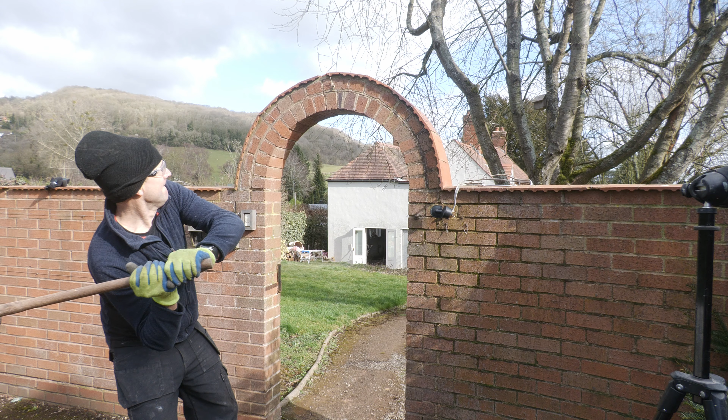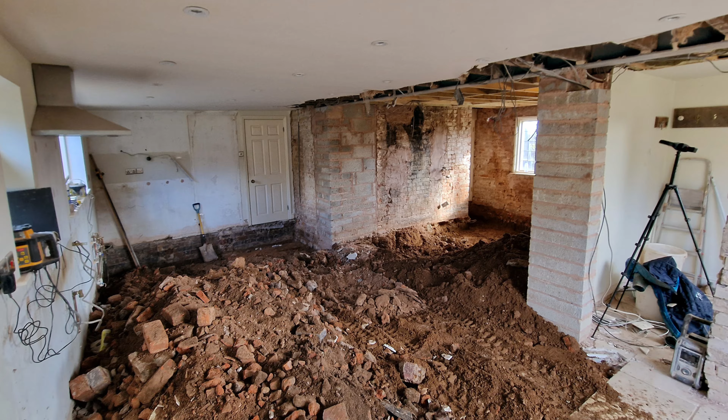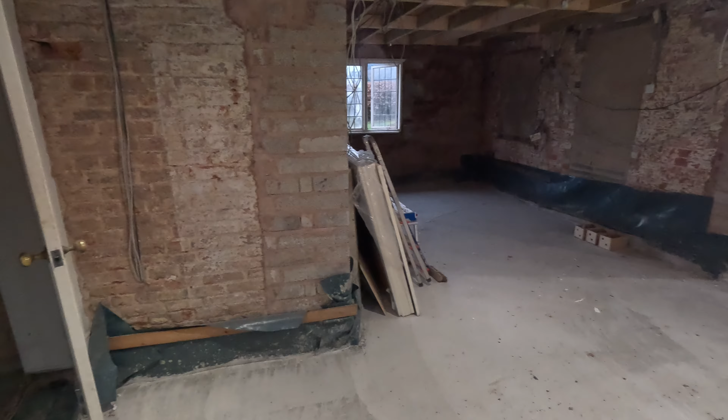A lot's gone on in the last couple of weeks. We had to demolish this gateway. I had to demolish these garden steps. I've had 7 skips, 8 tons of the wrong aggregate delivered, and a cement mixer with too much cement. But we've made enormous progress, and we now have a concrete slab poured in our kitchen, where only a few days ago it was looking like this. So in today's video I'm going to be explaining exactly what's been going on, with a particular emphasis on the underfloor heating system I'm going to be installing, which is going to be a Polypipe water-based system. And crucially, the builders have now left, so from this point on I'm on my own.

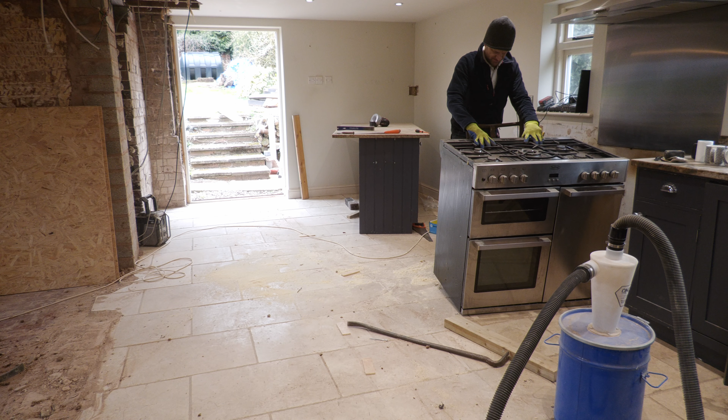So with the knock-through complete, I was in a race against time to remove the old kitchen so as not to hold up the builders with the excavation of the floor. The granite had been glued to the kitchen units with Gripfill and the sink with silicone, so I set about cutting through the Gripfill with my multi-tool. It was important to keep the granite intact and to dismantle the kitchen as carefully as possible, as I'd sold the kitchen for £950 on Facebook Marketplace.

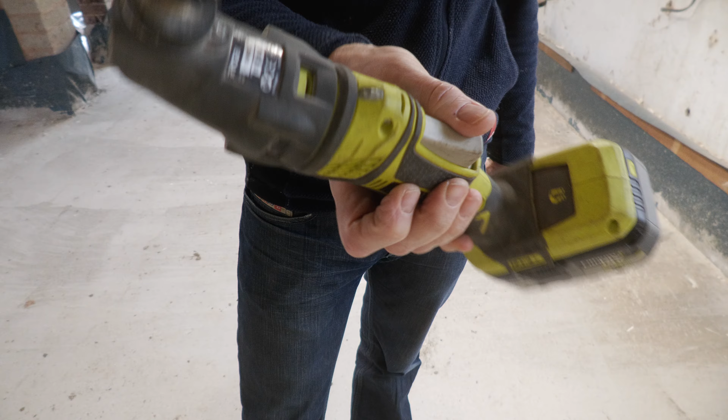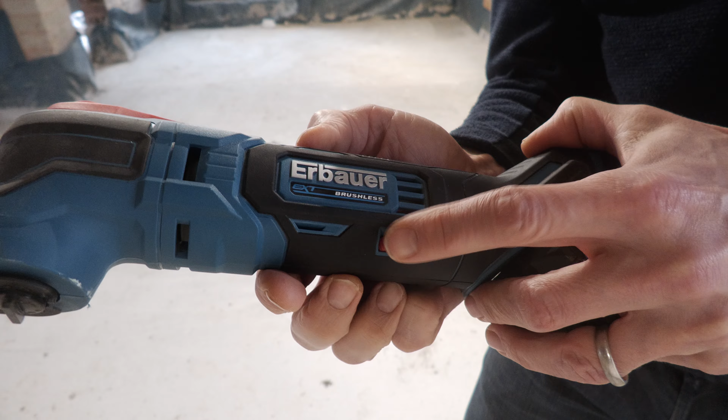I've had this multi-tool for a number of years now, but it kept overheating - I think the brushes probably need replacing. So I ran out to Screwfix and bought this one from Erbauer. I thought £84.99 for a variable speed, brushless multi-tool with a little case of accessories seemed like a decent deal. But also I had to buy something quick because I needed to get the kitchen out.

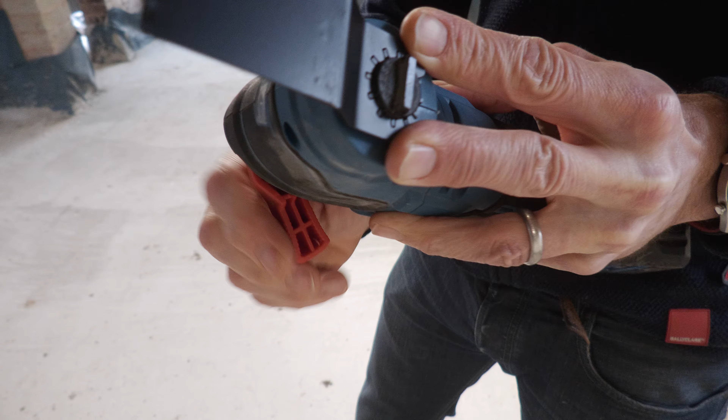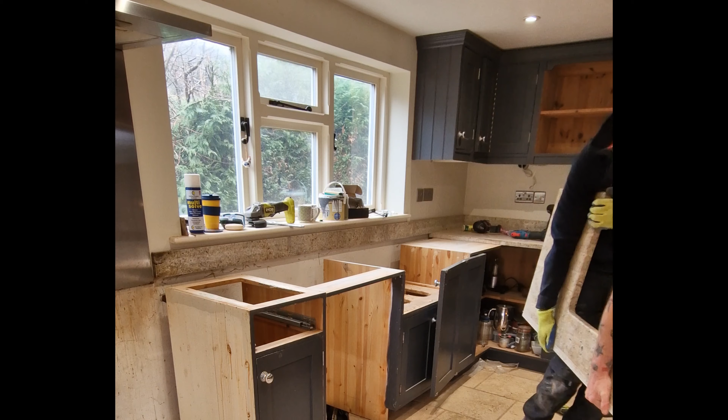The new tool was a vast improvement on the old, and I was able to cut through the remaining Gripfill and remarkably managed to remove all the granite without breaking it, even the section around the sink - apart from one of the splashbacks that unexpectedly fell off the wall and snapped off the corner.

When we were taking out this supporting wall last week, we got quite a lot of dust from the kitchen into the rest of the house. You just can't stop it getting in. So I was quite anxious to make sure this didn't happen when we were excavating the floor this week.

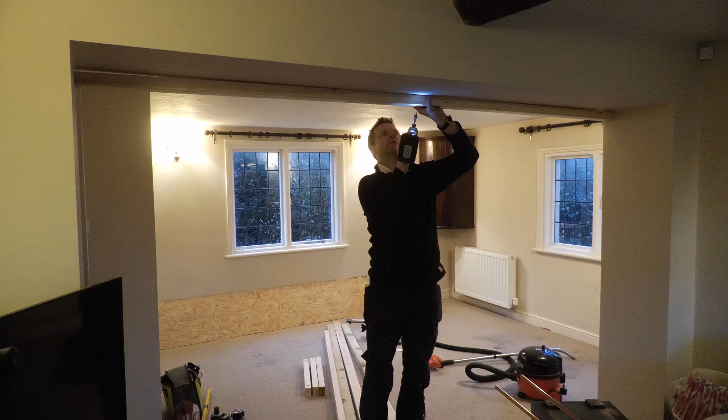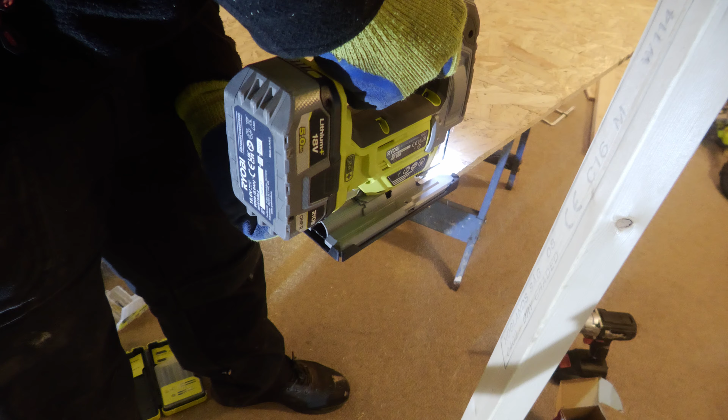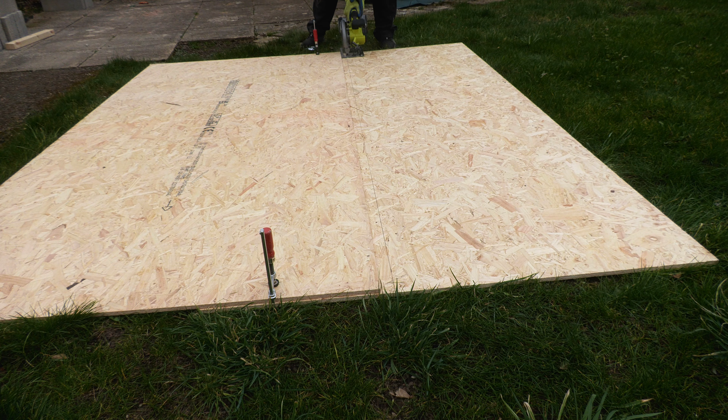Obviously screwed the shuttering ply to it, and then used expanding foam to fill up any gaps, because it's really important that there weren't any gaps for that dust to get through.

And this new expanding foam gun that I bought, which was a recommendation of Sam on my Discord forum, has been fantastic. You may have seen my video a few years ago with my original gun, which I think was an Everbuild. This one is non-stick, and that's quite a crucial difference - with that Everbuild, you had to clean it out almost immediately after using it, certainly a few days later. And even after cleaning it out with the acetone spray, I often found the ball bearing inside it stuck the next time I tried to use it, and you end up wasting so much foam. Whereas this, being non-stick, is much better because you don't have to clean the gun out as often.

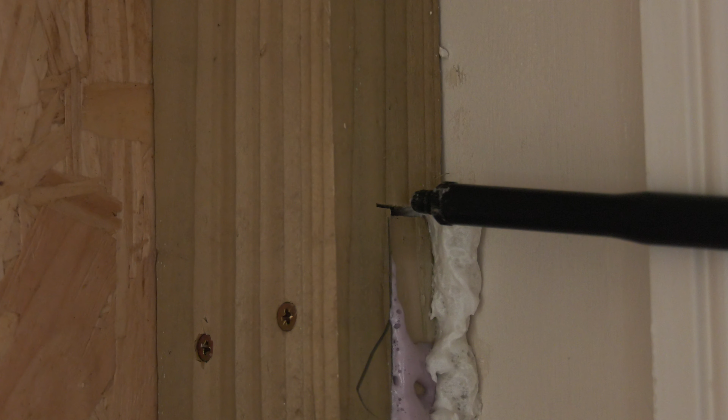You can leave the gun with foam on it for a much longer period of time. And this little control knob gives you really good control over the volume of foam coming out of the gun - you can slow it right down to a dribble.

Why am I boarding up so much of this room, you might wonder? Well, partly because I want to remove this chimney. And I know this chimney isn't load bearing and doesn't continue into the bathroom above because I laid a floor on top of it back in 2014.

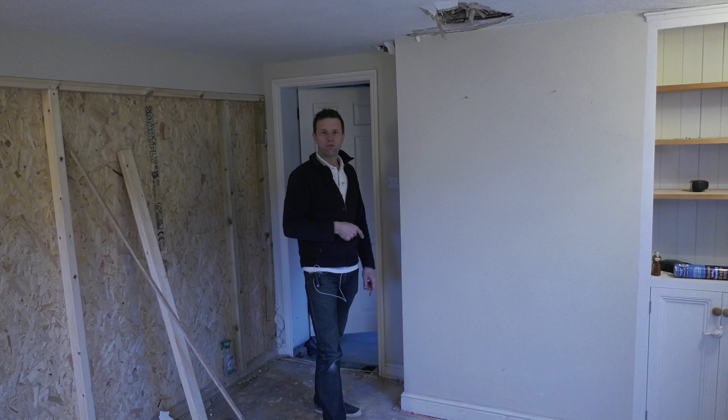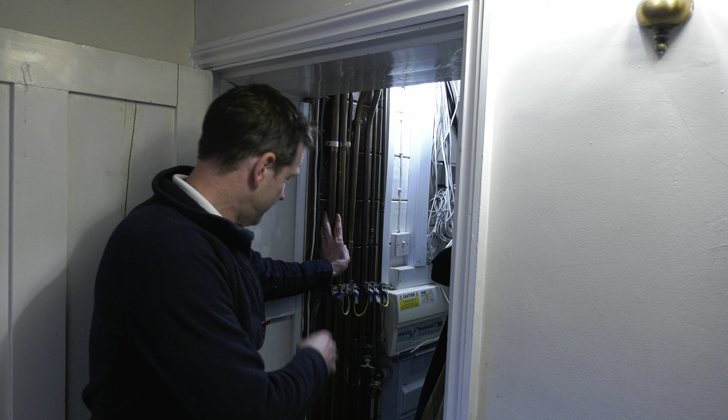The reason I want to remove this is because the manifolds for the underfloor heating will hopefully be on this wall, which removes the need for me to snake all the underfloor heating pipes around the room to where the central heating flow and return pipes are in this cupboard. The plan instead is to send an extension of these flow and return pipes across the floor to where the manifolds will be for the underfloor heating. And to do that, I'm going to have to cut up the floor to get across the room.

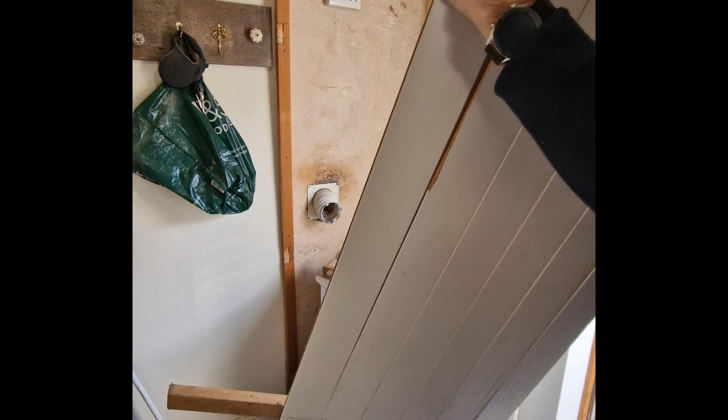I also had to rip out the cupboard I built a few years ago that housed our tumble dryer and washing machine. The pipework for the washing machine went in a diagonal right across the kitchen to this point here, including the waste, and considering how badly it was done, it's a miracle it never got blocked.

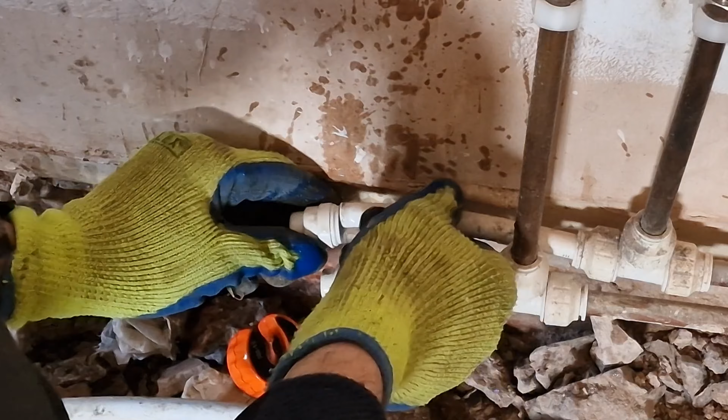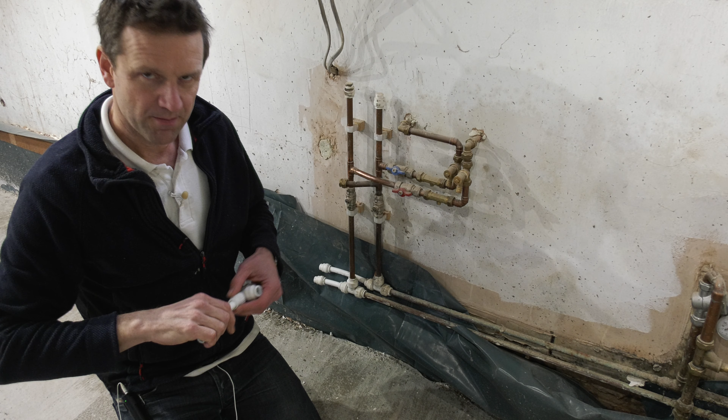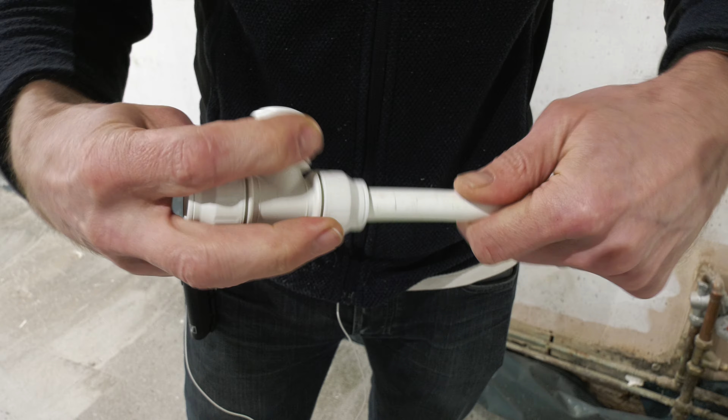But it did need capping off before the boys could work on the floor. I put a couple of push-fit stop ends onto the plastic pipe that the plumbers had installed back in 2010. I've never used this stuff before, it's remarkably easy. I'm still not sure whether I like it long term, but just remember, if you're using these fittings, don't make the mistake I made initially of not using the inserts that you have to insert into the end of the plastic pipe to support it before you insert it into the T or stop end and make it fast.

If you saw my video recently where I installed the dog shower with hot and cold water, the plumbing for this is now in jeopardy, given we may not have the sink in this position in the new kitchen. What I have done is made use of those 15mm plastic pipes to install a temporary cold water feed to our porch so I can reinstall the washing machine and dishwasher to tide us over until we have the new kitchen. Very important, as this could be a while.

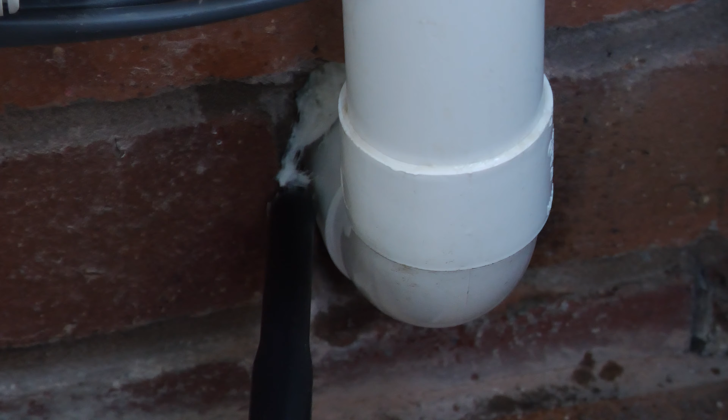I improvised a temporary waste with some spare fittings I had lying around and managed to route the grey water into the drain with a water pump hose.

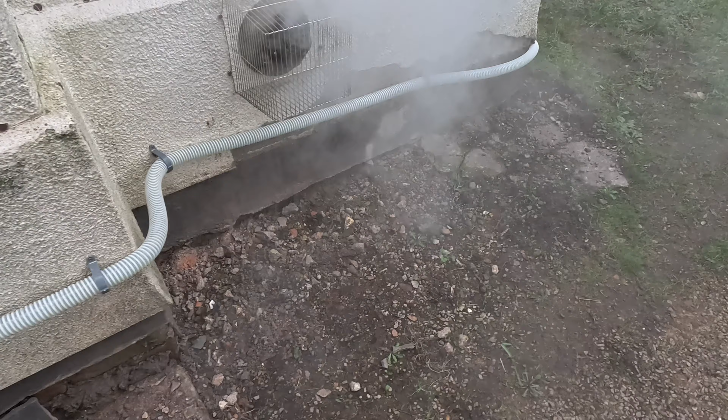And so we're on to the excavation part of this project, where I had to basically dig up the floor in preparation for the underfloor heating system.

There's a really good reason why people don't often attempt this in old period properties like this, because it's so much harder to excavate and more expensive to excavate all of this material than it would be in a new build, where you can simply plan the different layers as part of the construction.

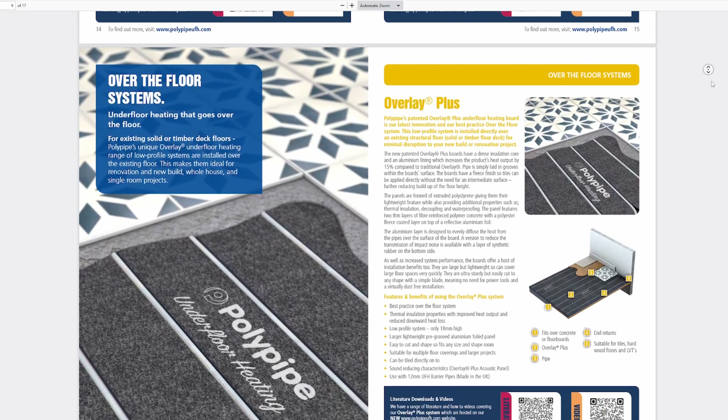Unless you're installing something like Nu-Heat's LoPro or Polypipe's overlay system, you're going to have to pull out a serious amount of earth from your house. In my case, 400mm, and I'll come on to exactly why in a minute.

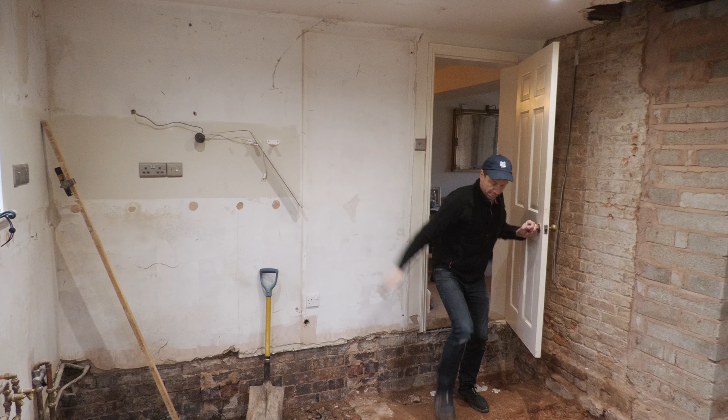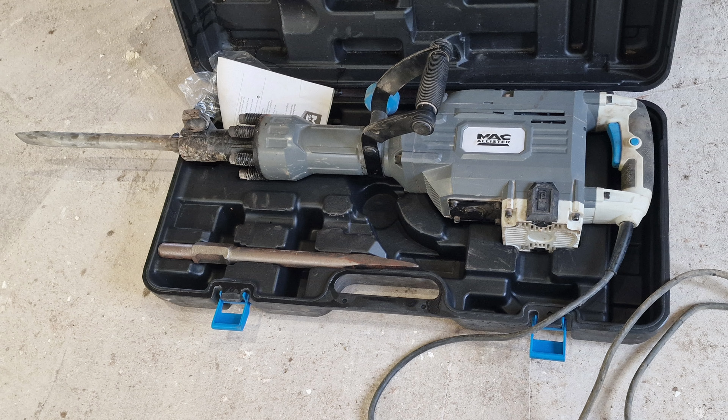One of my builders, Gaz, started using my MacAllister concrete breaker to dig up the floor. Thanks again to Gosforth Handyman's Andy Mack for recommending this to me. It's been a beast on this job. By the end of the day, most of the top layer was up and carted off to the skips in wheelbarrows.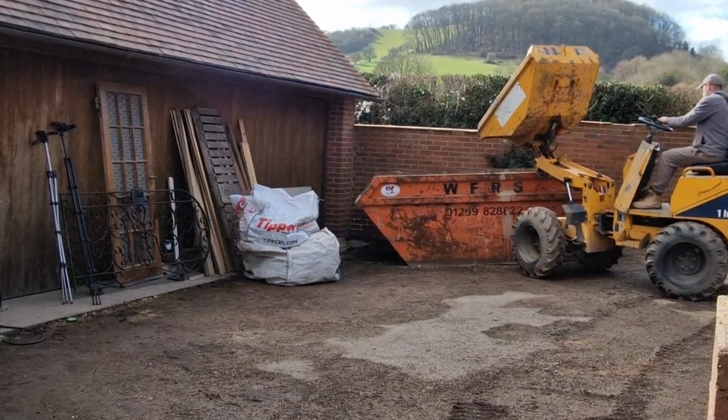But we still had a lot to excavate, and so I suggested we hire a micro digger to dig out the subsoil, and my other builder, Danny, then suggested we hire a 1-ton skip loading dumper to cart the soil from the house and into the skip, because once you've shut the door on the skip, it's very difficult to lift the wheelbarrow to empty it into the skip.

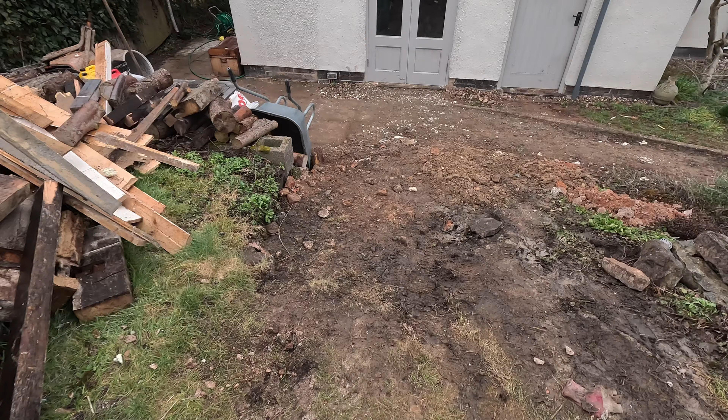This meant demolishing our garden steps and also the gateway into the garden, so the dumper could fit through, although I plan to remove both of these at some point as part of the re-landscaping of the garden. And I've got to say, demolishing that arch was great fun.

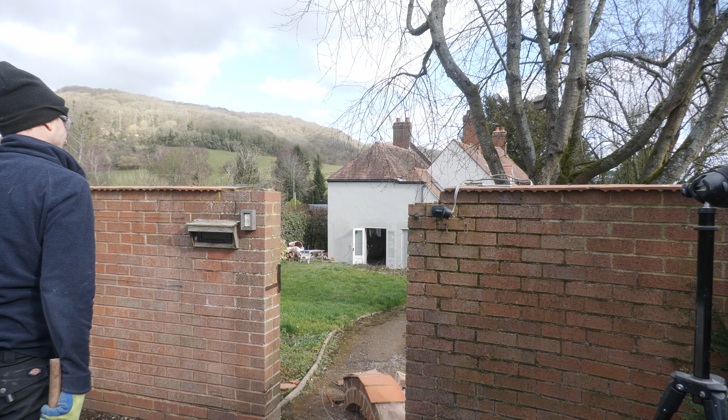Excavating 400mm of floor was producing a lot of bricks, soil and rubble, not to mention some other unwanted guests like these roots. We couldn't have managed without this mechanisation with the micro digger and dumper.

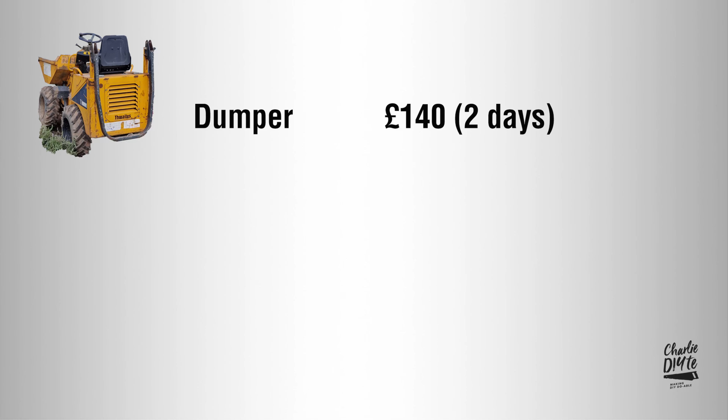But the costs were beginning to mount up at a frightening rate. So why take out 400mm of thickness, which after all is a lot?

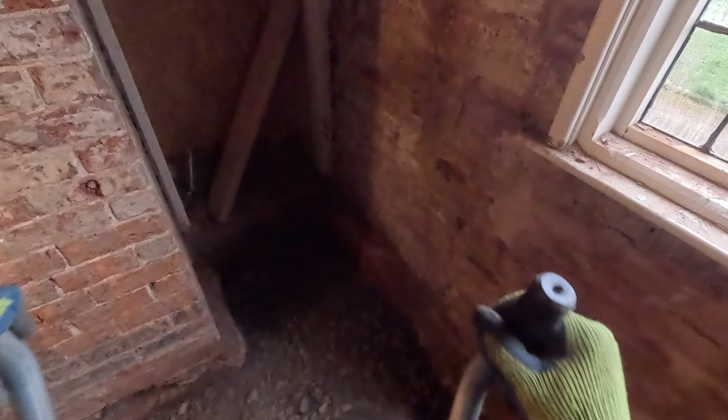Well, in our case, we've got 150mm Type 1 MOT, which is sat directly on a compacted soil base. You saw all those roots we pulled out. We wanted to make sure we had a really good base to start building off, and we compacted that with an Evolution whacker plate I hired locally.

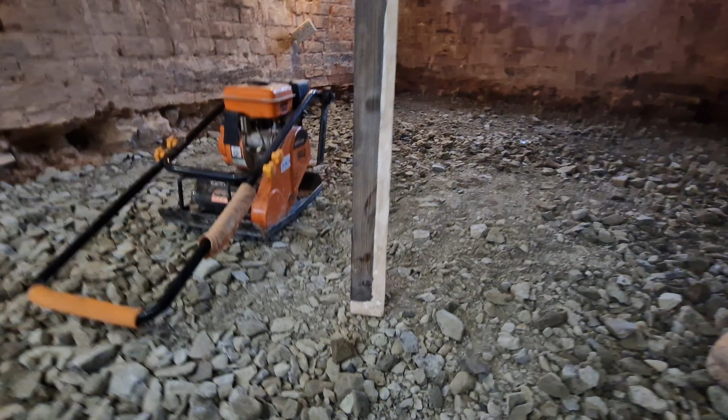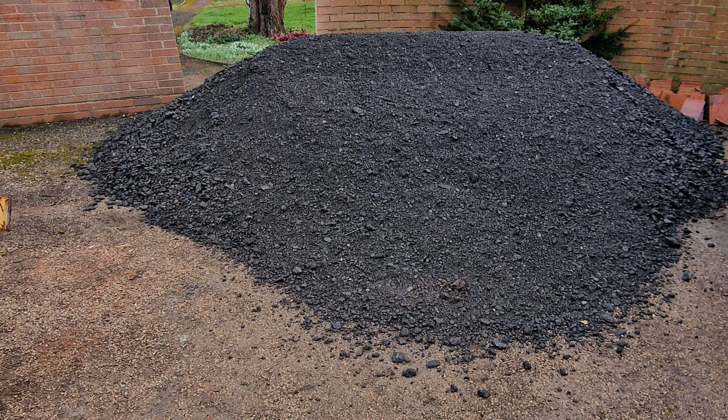We had a near disaster because on instruction of my builder I ordered what I thought were scalpings, which turned out to be planings. Some people even say these are one and the same, but you can't use them as an internal sub-base because they're basically recycled scrapings off the roads, bitumen based and therefore degradable over time and susceptible to slumping, quite apart from absolutely stinking of tar. After a sleepless night, I contacted the company that had dumped 8 cubic metres of them in the drive, and they agreed to take them back for 50 quid and replace with Type 1 MOT.

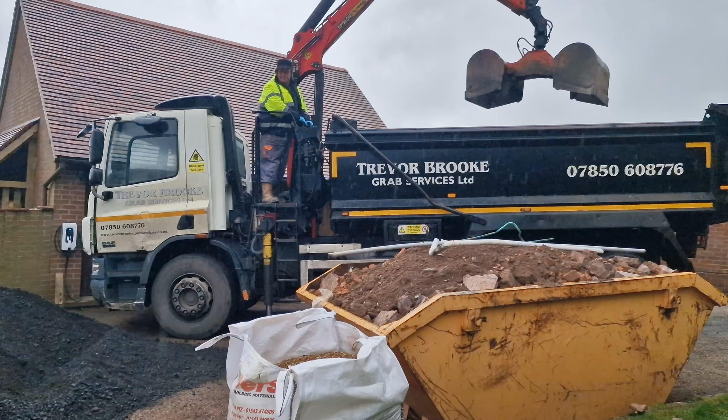We'll come on to the benefits of that Grab Lorry in a bit. We then spread out 10mm of building sand as a protective blinding layer for the damp-proof membrane.

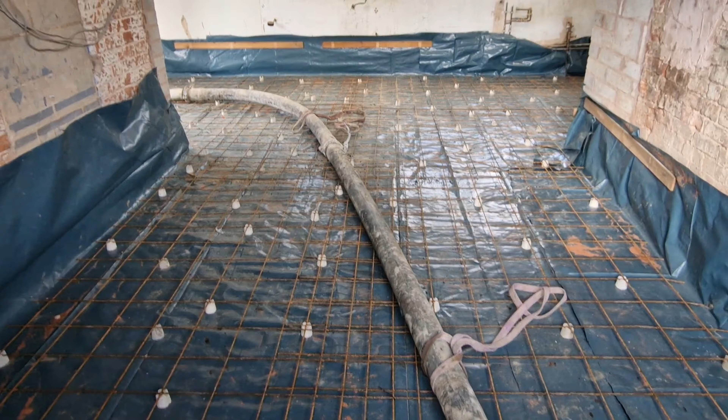A reinforcing mesh was then suspended off the floor with these mesh men, and then 100mm of concrete followed by 100mm of PIR, which leaves me 50mm, if my memory serves me correct, for the screed, which obviously contains the underfloor heating. Now, if you're planning a similar project to me, you want to think about two issues here. Firstly, a basic requirement to comply with building regs, but secondly, a more practical issue as to what you're trying to achieve for your own development.

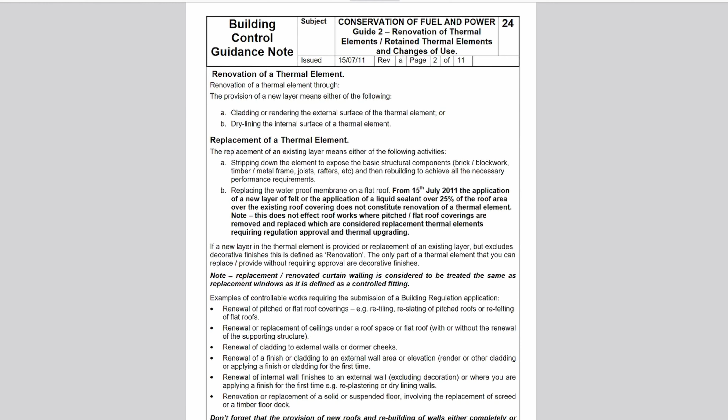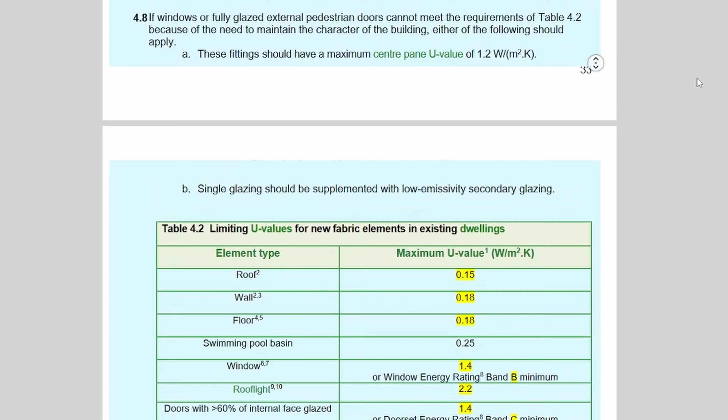I had to try and work out whether what I'm doing with this floor is renovating a thermal element or replacing a thermal element, as defined in this building control guidance note. Thanks to the guys on Discord for finding this for me, I'll place a link in the description below the vid. The reason this is relevant under the building regs themselves, again, I'll put a link to that in the description, is that new elements have to comply with a lower U value of 0.18, whereas for existing elements undergoing renovation, there's a higher limiting value of 0.25.

Now the point here is these are limiting values and you want to do everything you can to come in as far below these values as possible, because you've got a one-off chance to make a massive difference here to the thermal footprint of your house. And there's another point here, correct me if I'm wrong, but as I understand it, if you can significantly outperform or undercut the U values on a thermal element, like for example this floor, it gives you a bit of leeway if there's another thermal element that you're either renovating or adding to your building project where you don't meet the target U values. You can offset one against the other to achieve compliance. So that's another good reason to go large on your floor insulation.

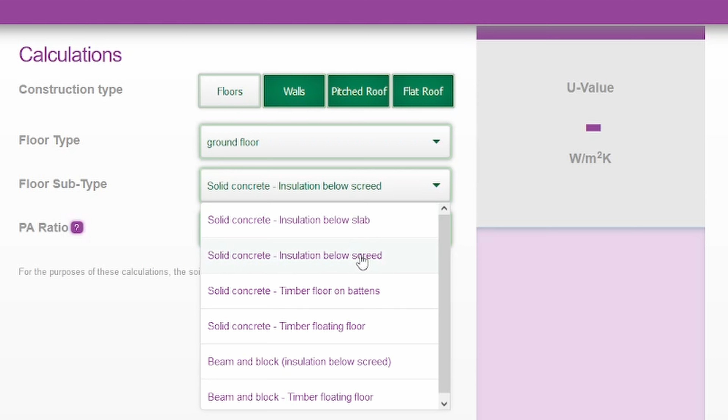So I went online this morning to the Ecotherm website, which has a U value calculator. You need to tell it the PA ratio, which is the exposed external perimeter wall of the room divided by the square meterage that you're insulating. And it's quite helpful because you can put in different thicknesses of PIR to see what U values you can achieve. And with 100 mil PIR, I can get to a U value of 0.16, which is pretty good, and 0.02 below the threshold.

And the more practical point is this floor was absolutely freezing before we started. You couldn't really walk on it without shoes on. It was unpleasant to do so. So what we're trying to do in this build is turn what was a fridge into basically a massive radiator under the floor. But the only difference with this radiator is whereas normal radiators, you're putting about 55-60 degrees of heat through them, with underfloor, the temperature that you have to pump through those pipes is a lot less, in the 40s. And that's where you get your efficiency from a massive slab that then starts radiating heat around the house. Anyway, we'll come on to that in later videos.

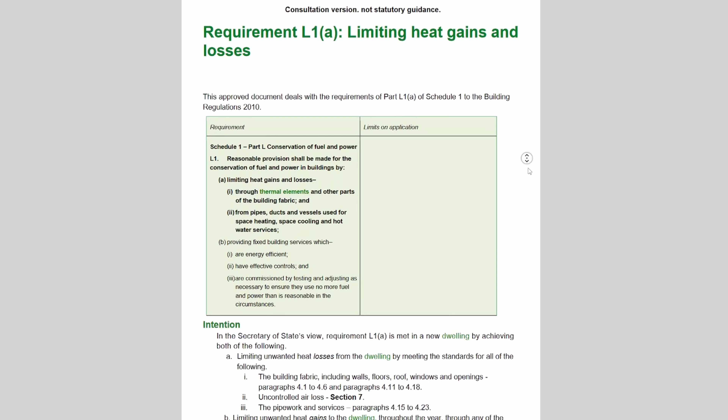Now, there's another important point to make here, which Simon pointed out on my community tab. Thank you for that, Simon. And the point is, for a traditionally constructed building like this, if you use limecrete in your new floor slab, you can get dispensation from Part L, which is the part of the building regulations that talks about heat loss and U values. And his point is you should be managing moisture levels properly in a building like this, which a damp-proof membrane like I've installed won't. His point is you should be putting in a geotextile membrane, which as far as I can tell is a bit like weed matting, 150 mil of Glapor, another geotextile membrane, underfloor heating on a geogrid, and finally a 110 millimeter limecrete slab.

Now, during the lifetime of this video, I'm going to get a lot of criticism for doing it the way I have, rather like I have when I did a video on insulating the internal walls of our house upstairs. My reply to that was that I'm trying to create a house which is habitable to live in. It was Tyrolean rendered on the outside in the 1970s. When we moved in, it had polystyrene backed wallpaper everywhere, so it couldn't breathe particularly well. And in fact, down here, there was a polythene damp-proof membrane, albeit not a very good one, underneath the entire floor that we hacked out. So my new crimes are no worse than those committed previously.

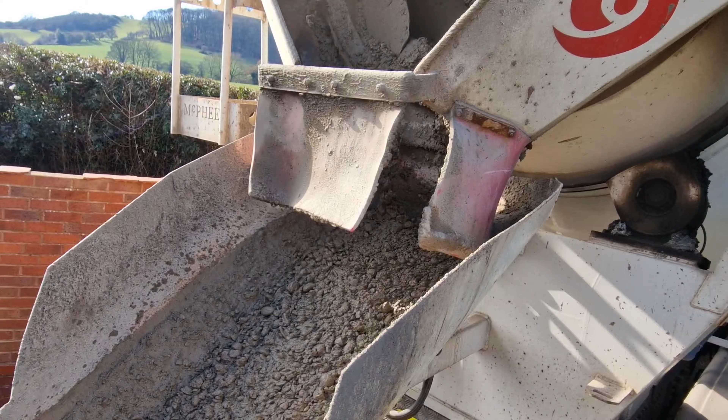So the concrete I ordered was a Gen 3 mix, which should come up to 20 newtons of strength, meaning it should be able to take about 20 tons. I'm probably going to be applying a Cemfloor screed, one of the most thermally efficient screeds for underfloor heating. And I'm sorry, it's just a decision I've made. I'm not going with breathable materials, because I'm trying to create the most thermally efficient house I can within my budget.

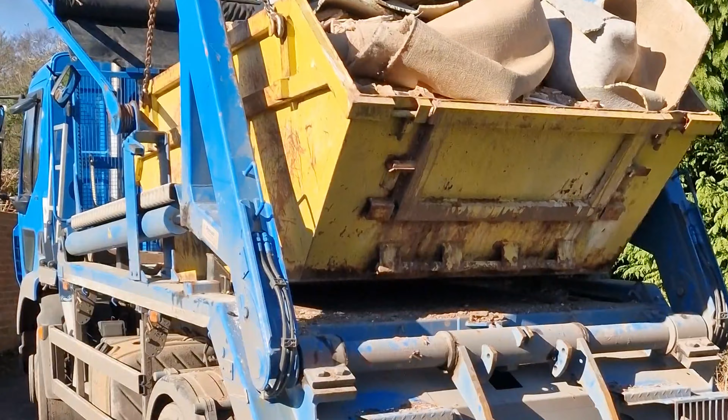Speaking of budget, I just want to pass on the benefit of something I've learned on this project. This is skip number 7, and on about skip number 5, the skip driver kindly pointed out that if I'd used a Grab hire lorry, I could have saved myself a ton of money. Several tons, in fact. Because a Grab lorry will take about 2.5 skip loads for about 330-350 quid, whereas I've been paying for each one of these skips between 265 and 295 pounds.

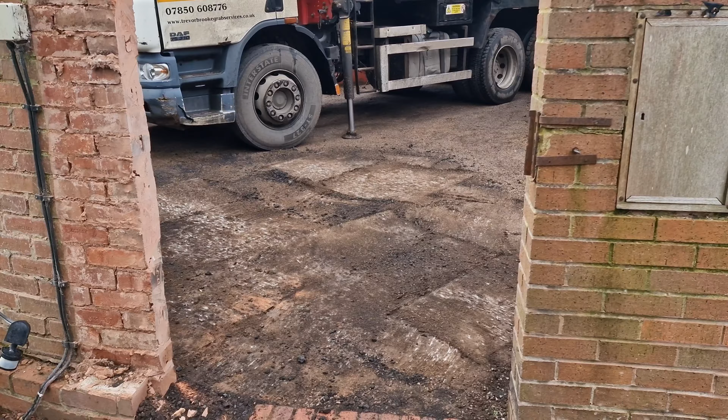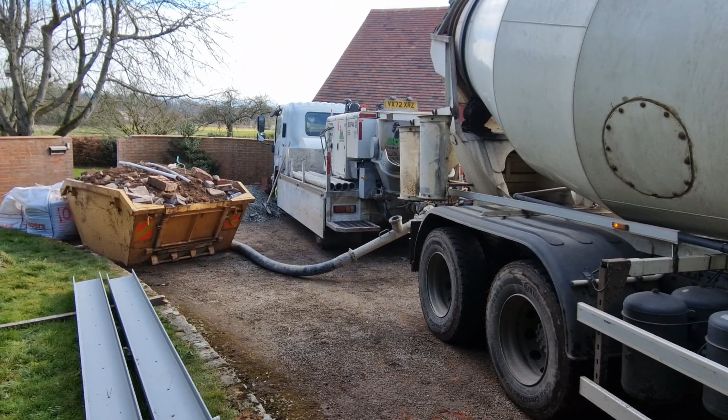So if I just dumped all of the materials from the house down here, the Grab lorry would have picked it up in the same way as it did that stinking pile of planings earlier on in the week. It would have been a hell of a job carting over 4 cubic metres of concrete down to the house in wheelbarrows, so we decided to get a concrete pumping company in to pump the concrete from the mixer down the approximately 30 metres to the house.

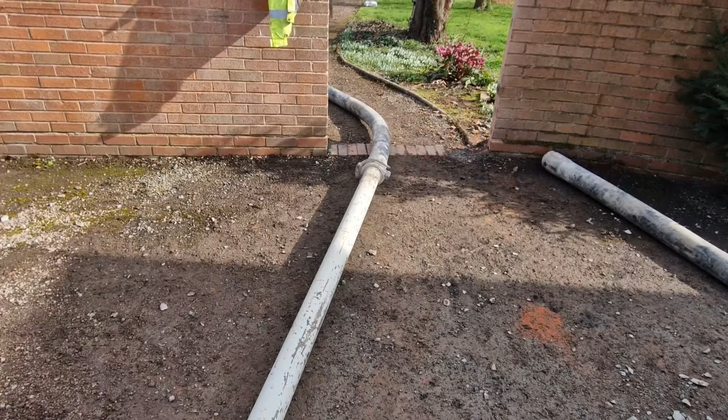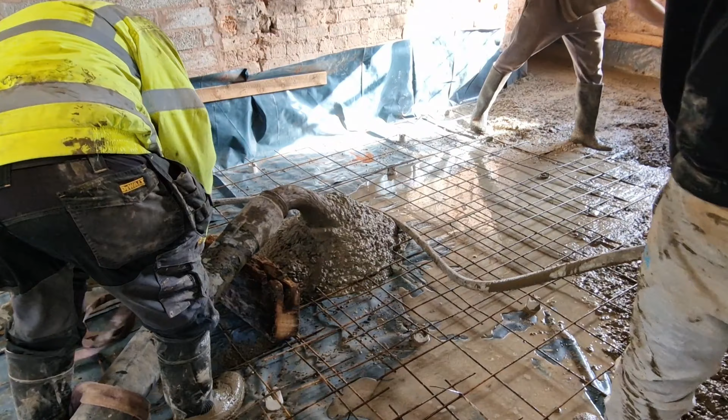The idea is the pumping team arrive an hour or so before the concrete to bolt together their pipes and get ready. At £340 plus VAT for 2.5 hours and then £75 per hour after that, you want to be as organised as you can and make sure the concrete doesn't arrive a minute too late. We did stray into the 3rd hour, partly because the concrete arrived half an hour later than scheduled, and so it ended up costing £500 on top of the £993 for the concrete. More on that in a minute.

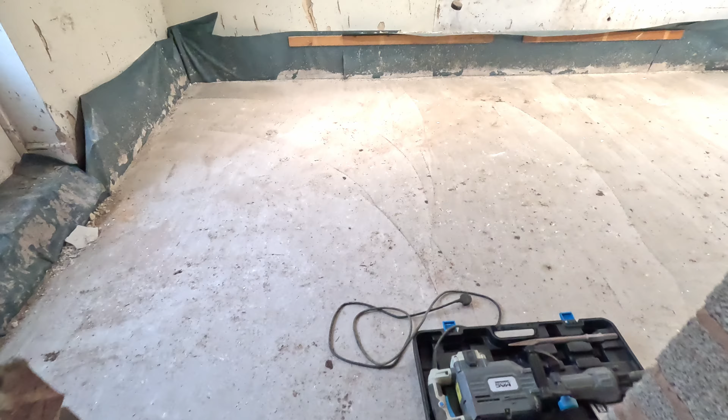The droning noise you can hear is a concrete vibrating poker, which basically vibrates the concrete to remove air bubbles that then provide consistency and strength to the concrete. As the concrete was pumped out, Danny and Gaz raked and spread it evenly across the room whilst trailing around the poker, and then, unfortunately after I'd switched off for time lapse and had to head out for the afternoon, troweled it smooth, or certainly as smooth as it needs to be for the next PIR layer, with that easy float you saw them using just now.

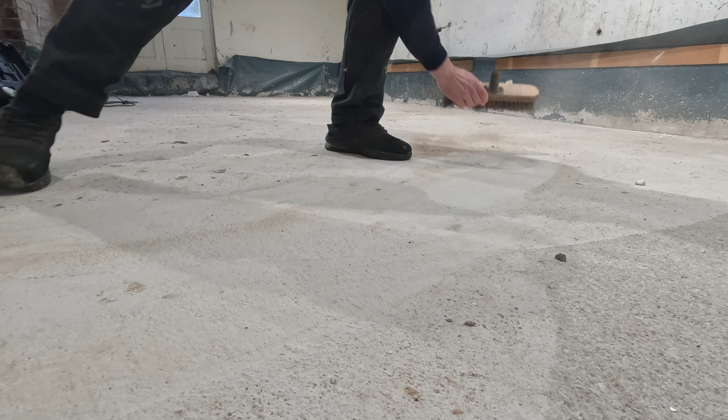And I've treaded in a lot of mud in this worsening weather in case you were wondering what all the stuff was all over the floor. So we need to have a bit of a clean up. There was one final stress, and that was realising that we had over 2 cubic metres too much concrete in the mixer, which of course they wouldn't take back with them. We'd ordered a 6 metre load. Don't really know why this happened.

It could have been when I was looking at those Ecotherm calculations. We've got a floor area of about 43 square metres; I think we were operating on more than 46, 47. God knows why we didn't check that. But just a message to you to double, triple check how much materials you use for a job like this. Luckily, we had this trench that I dug for a new square bay window foundation that we could lose most of it. And then the farmer took some as well, and the remainder went in the skip. But this is all stuff I paid for, which is really annoying.

So that's it for today. I hope you found that interesting. After 3 days of video editing, I can't wait to get on with the next stage now. I need to demolish that chimney. I've got a little bit of upgrading to do to our temporary kitchen just to make it a bit more livable. And I've got the kitchen walls to strip off back to the brickwork.

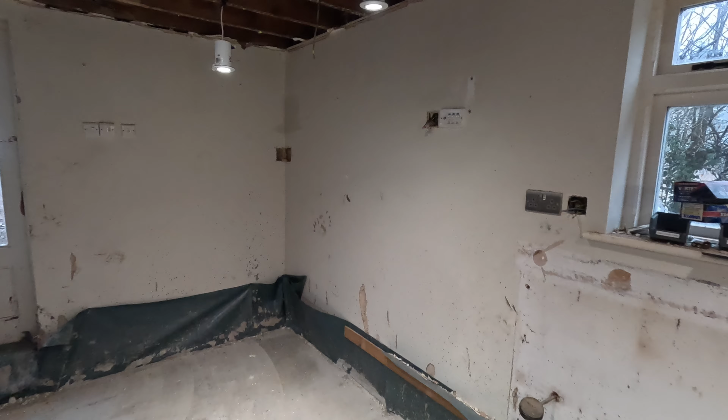Important point there, look out for my YouTube short pointing out why you don't dot and dab a wall like this without any vapor barrier or insulation behind, as my builders did back in 2010 when I got home one day to find out they dot and dabbed this whole wall without asking me. You can see the mold forming behind this, and I think this is going to be a really useful observation for all of you lot if you're planning your own projects.